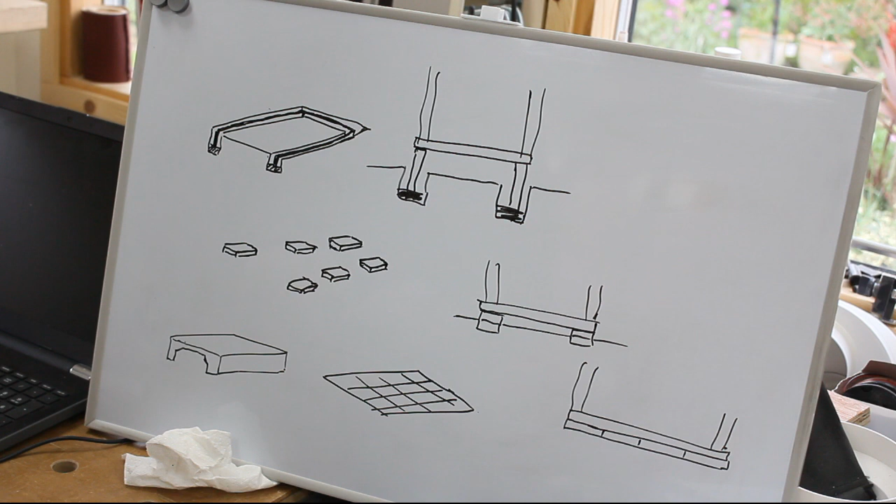So using my rubbish drawings as usual, let's just have a quick look at the sort of normal options you get with both a house or any sort of structure for foundations. Now with a house you can either do what is probably the most common way. You take a piece of land and you dig a trench. You fill the bottom with concrete when you get down to a decent finish foundation, and you lay either bricks, blocks or something like that, bring it up to ground level.

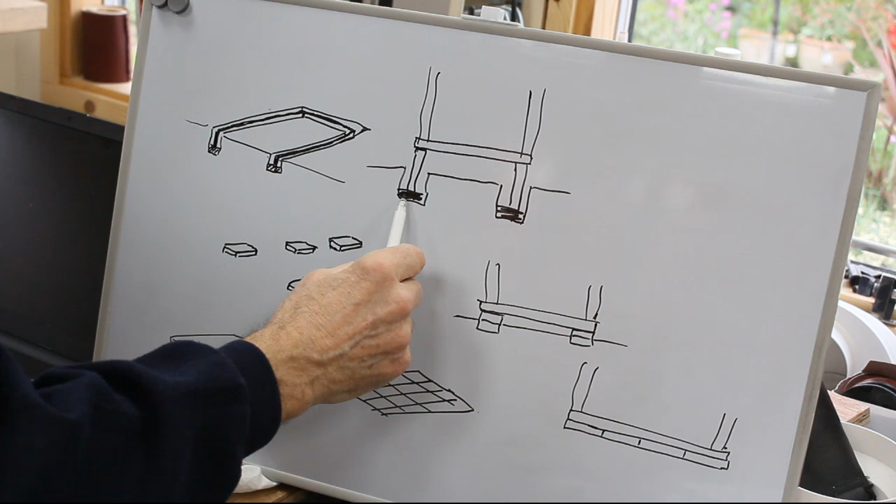Looking at it in section there, as I say, you've got the ground level there, you've got some concrete in the bottom of the trench, bricks and blocks going up to ground level, and in the case of a shed you'd then just put your joists across your floor and then you build the shed up off that. That is one option.

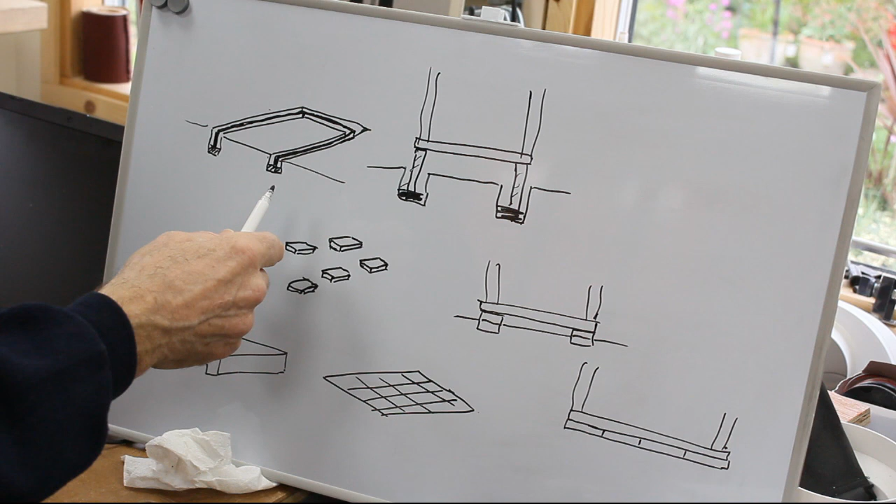To get to a decent foundation for a shed, you've probably got to go down quite deep. It leaves you an awful lot of earth to get rid of. You've got to get mixing concrete, and you still run the risk, if you're not down to a decent foundation, of things moving, tree roots kicking things up, all sorts of things that can give you a problem later on.

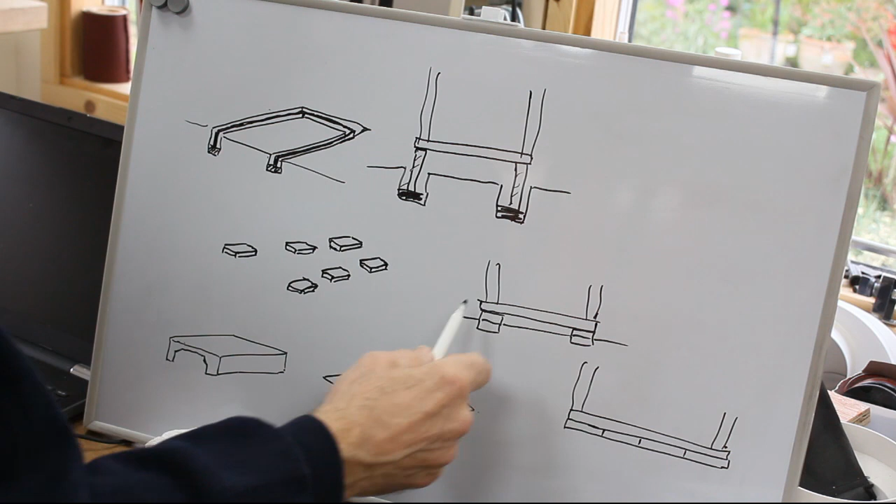Second option, in a house or a factory, it would be either piles or bases that you'd have. In a shed all you really need is probably some blocks laid flat on the ground. You'd probably dig them in, one block deep or so to get to a decent foundation, maybe put a bit of gravel or hardcore underneath it and bash it down. Another block on top just to give you a bit of ground clearance, and again put your shed up on top, and that works quite well for a shed.

Again, there is the option that things might move around a bit, but it's a valid option that you see quite often. A lot of the American videos that you see for people making sheds, they'll opt for this sort of arrangement. Perhaps the most common in Britain and the UK.

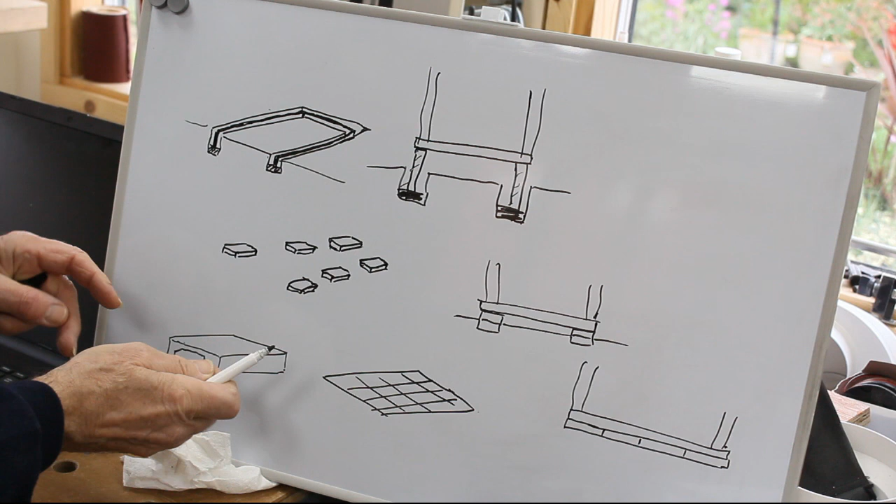If you go for a housing option again, you would dig big trenches and put a single raft of concrete in with reinforcement in it, and that way if there's any subsidence or movement at all, the whole structure will move as one, so that whilst it might tilt slightly it won't actually crack or anything like that.

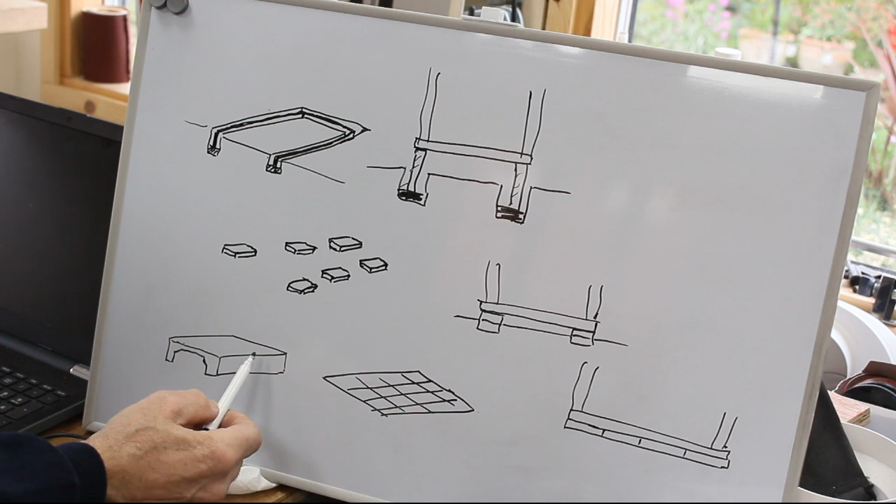Clearly it's unlikely that you're going to be putting a raft foundation in under a shed, although you might put in a solid concrete slab, which will give you the option. But again, if you're doing that, you're going to need probably 3 or 4 inches of concrete, 3 or 4 inches of hardcore at least, so you've got quite a lot of excavation to do.

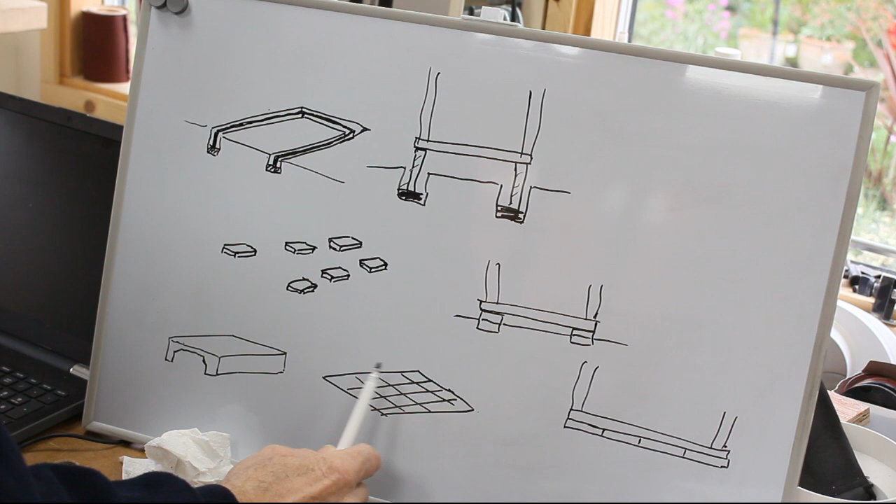I think the most common way that folks do it, and certainly the way I've done 75% of the shed area, is just basically dig out a little bit, blind it with some sand or concrete or loose mortar, dry mix, and lay slabs on it, and that way you're achieving pretty much the same thing. You've got something which will spread the load from the shed into the pads of the slabs, and in section you've just got the slabs, and then you just lay your joists on top.

Now for the old small shed, that was exactly what I had. It had moved over the years, there were 1 or 2 bumpy bits, but I wasn't going to disturb it, because once it's settled and it's in its right place, it's unlikely to move a lot after that. So although it was slightly out of level, I've worked on that as my foundation base.

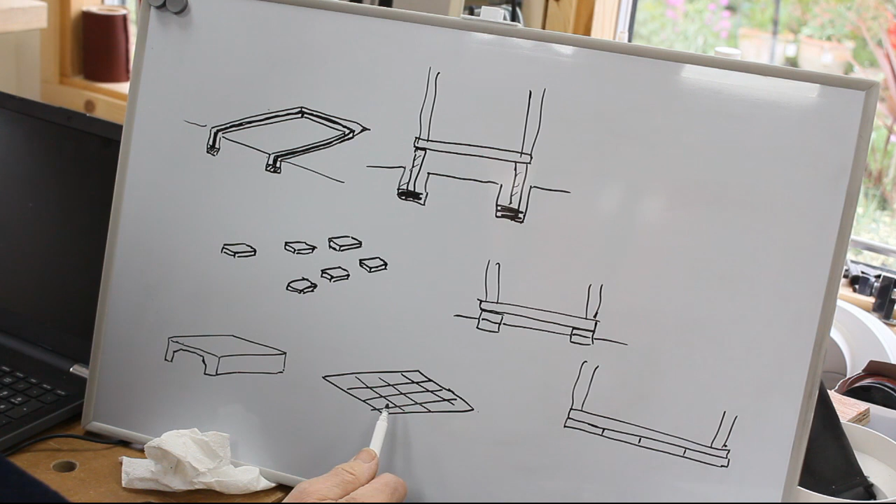So the original first shed was situated on slabs next to a paved area and a garden area, and when that was removed, it left me an area that had got a stable base, slabbed. They'd moved very slightly and were undulating here and there, which was something I'd have to correct, but at least it gave me a solid foundation that it wasn't really worth disturbing.

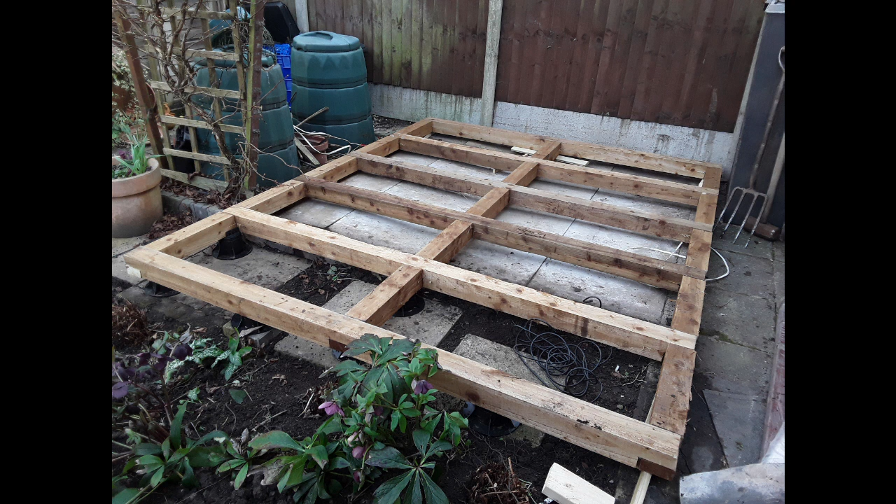You can see the slight differences in level, but it gave me a guide as to where I was going to go in the garden and have to remove plants and soil under there, and that left me a step of about 6 inches down that would need to be dealt with. Now, I could have filled it up with concrete or bricked it up, but as it was, I went down to a reasonably decent foundation with some slabs and used decking risers.

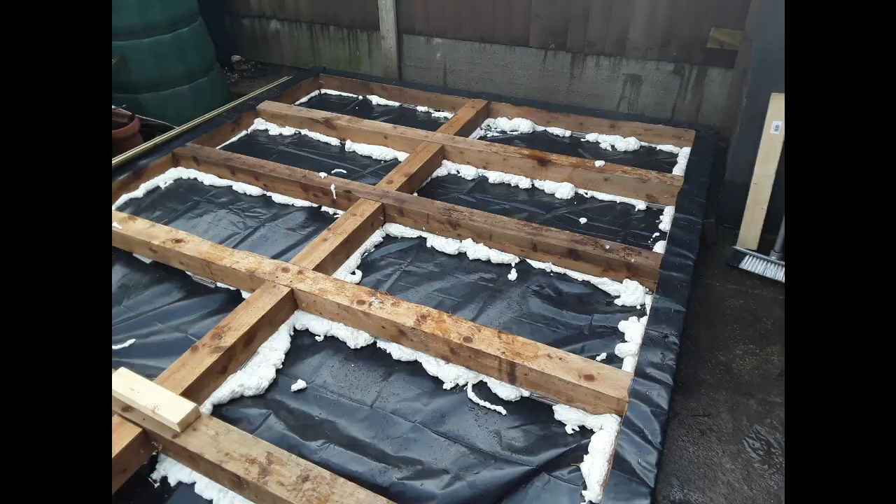The one side of the base is sitting on the existing pathway anyway, so that gave me a reasonably good solid foundation. I then put the whole thing onto a heavy duty damp-proof membrane, packed it up at all the intermediate positions with tiles to get all the levels right, and then to make sure nothing moved and none of the tiles slipped out or anything with vibration, I put some foam underneath, and that kept everything solid, rigid.

Wrapped the damp proof over the top of the 4x4 timbers, probably a bit overkill. Round the outside edge, you'll see later on, they're needed because they provide a base for the floor, but the intermediate cross rails could have been a 4x2, I would have thought, but again, I wanted something solid and rigid that would act almost as one solid piece of timber when it was all screwed together.

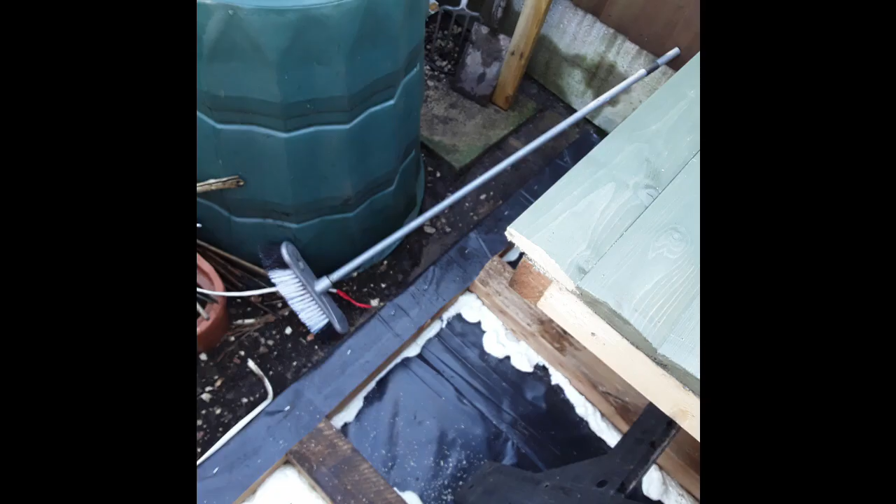The lower end, you can see the floor is actually raised up on those decking risers, and the only problem I had was that it was gathering rainwater every time it rained, and I had to keep bailing it out. The wall panels, you can see laying down flat there, have got a bottom timber which sits on top of that outer rail of foundation, and that allows it to drip down onto the ground outside, and it gives me effectively a weather-tight seal all the way around the edge.

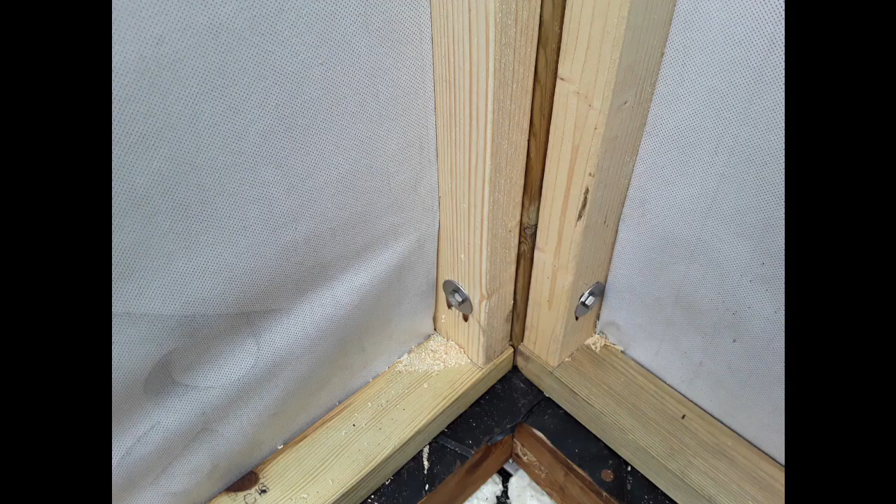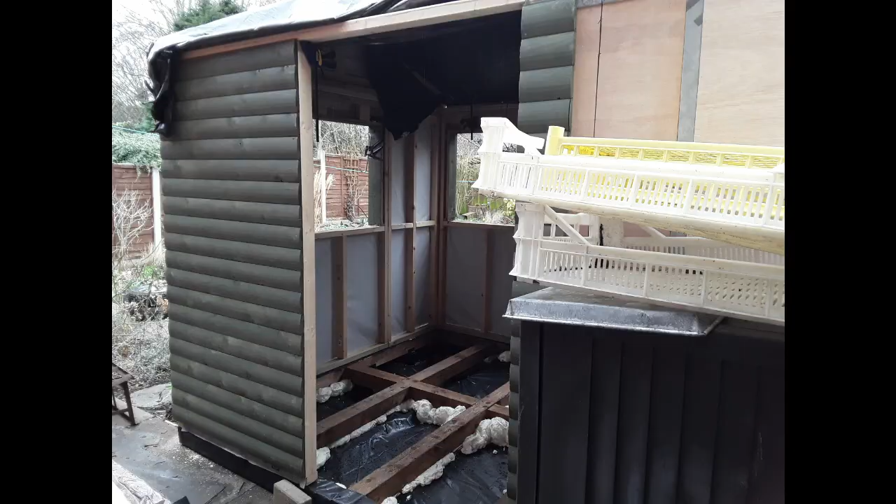Once the panels are erected, you can see that they sit on that base. The outer cladding goes down in front of it, and there's a ledge inside which will be used later on for the plywood to sit on. And then what that did was allow me to put the walls up, put a temporary roof on, and the whole structure was then watertight without having to worry about the flooring itself.

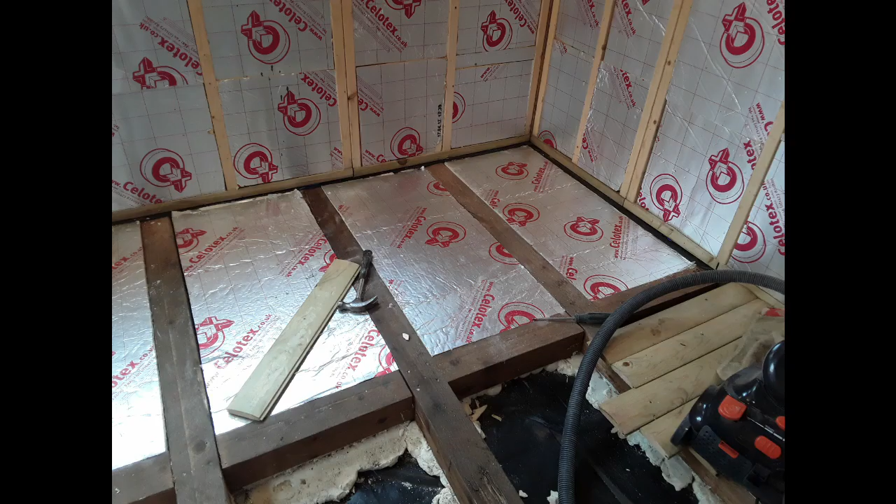The reason I had these 4-inch timbers on the outside was so that I could sit the floor on all the way around the outer perimeter, and it did mean that I could just get on with doing the insulation in the dry. It was not very good weather when I was putting the shed up, so I was able to get on with all sorts of other jobs inside while that was going on outside, and not having a problem. So that was the reasoning behind doing it that way round.

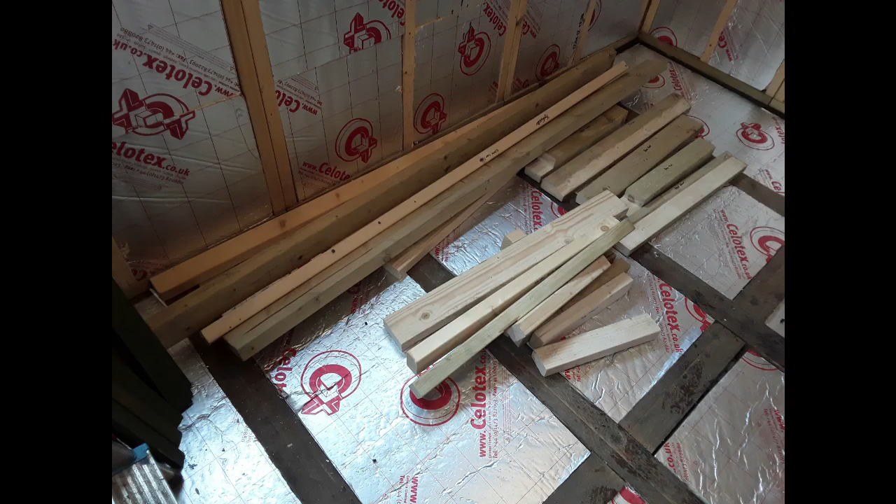It's probably not what most people do. They put a foundation in, they put a base down, and then they build the walls off that base. Nothing wrong with that, but what this does mean is that I can actually lift the floor if I want to. If there's any problem with levelling or anything, I can actually pull the insulation up and get at the foundations and re-level if I ever had to. Not something I'm looking forward to doing, or I hope I have to do, but it is a possibility.

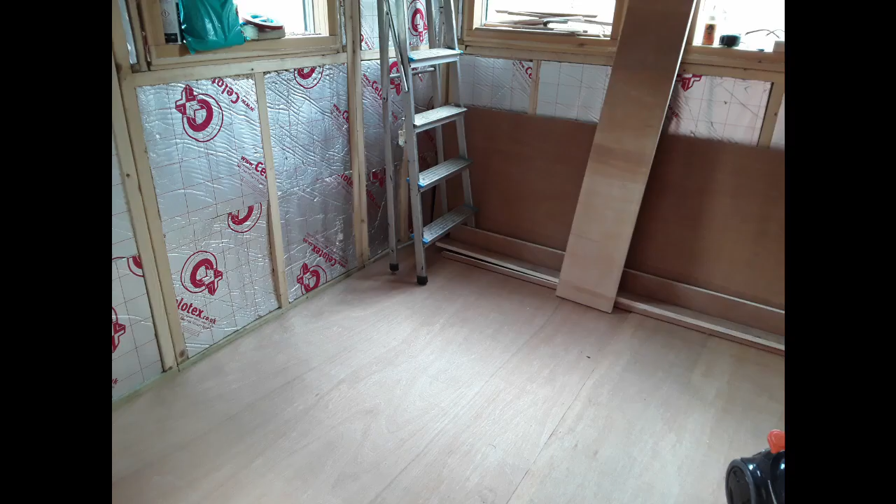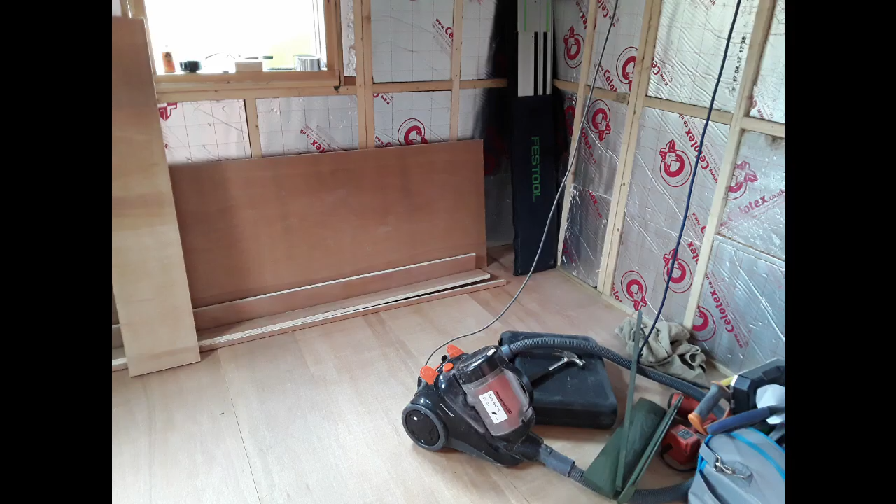And again, it's very easy then, 2.5 sheets of plywood cut. The 8-foot width was fine anyway, because it was designed to be a width of a plywood sheet. So it was 2.5 sheets of plywood down on the floor, and that gave me a solid base to work on. And again, there was no worry about it being affected by the rain or anything while I was doing it, because it's going down in the dry, in the warm, and it gave me a good solid base.

On top of that, as a sacrificial covering, I've actually put some laminate flooring on a foam backing. May seem a bit too much for a workshop, but actually it's ideal. It cost me about £5 a box, and I needed 3 boxes, I think. But it's given me a sacrificial base that if I drop things on the floor it doesn't damage anything other than the laminate, and I can, by removing a skirting board, take the whole thing out and replace it in 24 hours effectively.

So that's how I did the foundations and the floor.